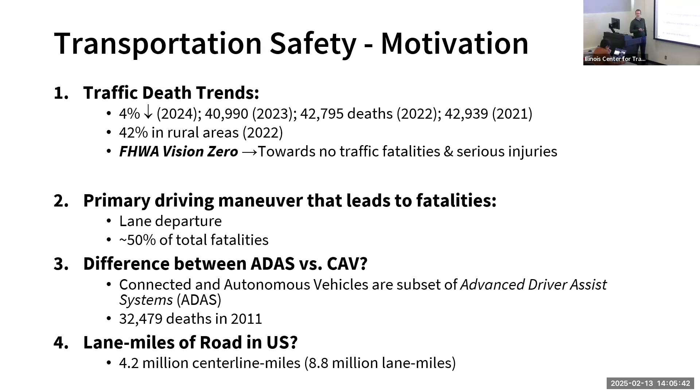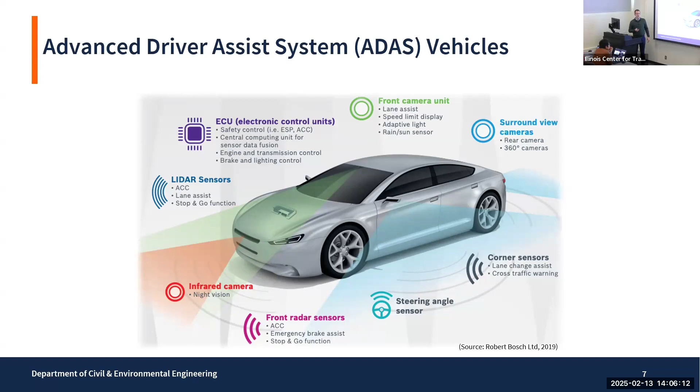We have all these sensors on vehicles that can do amazing things. They can automatically stop our vehicle from collisions, keep us between the lane lines in many cases, and do adaptive cruise control. So how do we use this better where we use the roadway as a sensor? That's the challenge, because most of you work on transportation in terms of the pavement and material side. Keep thinking about how you use the roadway as a sensor. What are the big problems?

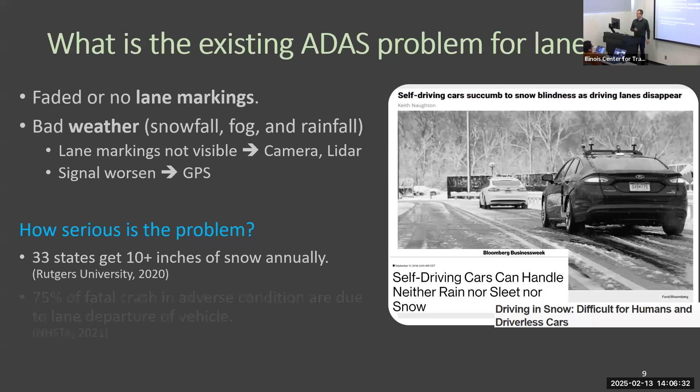Some of you have seen this: if you've driven in vehicles with lane assist in adverse weather, they don't work so well. They can't detect the lines, because that's how they work, based on computer vision. That's kind of how we got involved in this - the lane assist systems don't work that well. They work well in Phoenix where it doesn't rain and you get sunshine, or the Bay Area where you don't have rain most of the year. So how do we do this better with what we have here in the Midwest?

One of the former PhD students came up with this idea: if we change the electromagnetic signature of roadway materials and focus on an area where we can detect a high electromagnetic flux, we can detect it and keep the vehicle in the road, but without any contact and without any active sensors. These would just be passive sensors because it's just bending the Earth's magnetic field and we're detecting it. This was Sachendra Dahal's PhD thesis, and it could work very nicely and complement what current vehicle computer vision systems do.

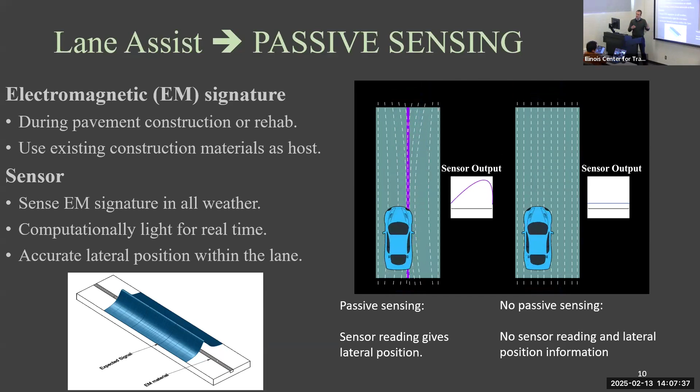You're just creating a material passive sensor that goes in the host binders we already use, whether it's cement or asphalt. How does that work? Well, imagine a sliver of the roadway has this electromagnetic material - you could just put some ferromagnetic material like steel, and you have these little magnetometers, about this size, they're not that big. These magnetometers can detect changes in the electromagnetic field of the Earth or the area, not just the Earth.

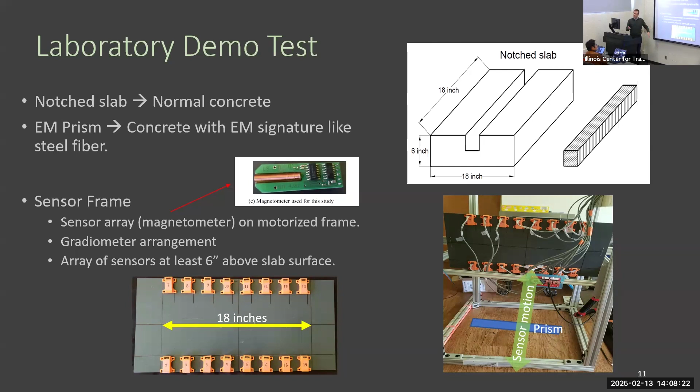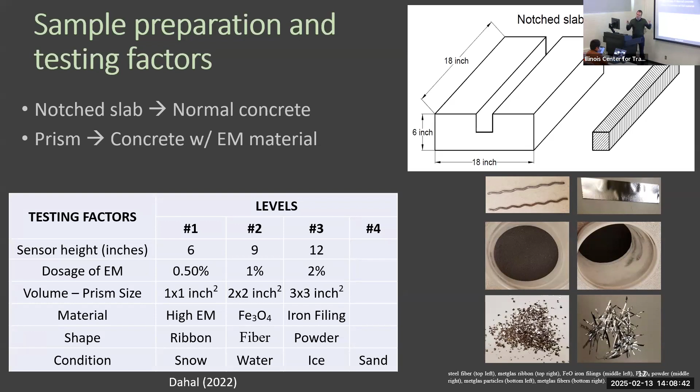You can put them on a sensor body, and then detect when you cross over this area with various sensors. So it's pretty simple, actually. The nice thing is you can use a lot of different types of materials - you can use steel, or other ferromagnetic materials with high magnetic permeability that are easier to detect. The point is it's not just one material, you can use a lot of different materials to do this, and we showed that successfully.

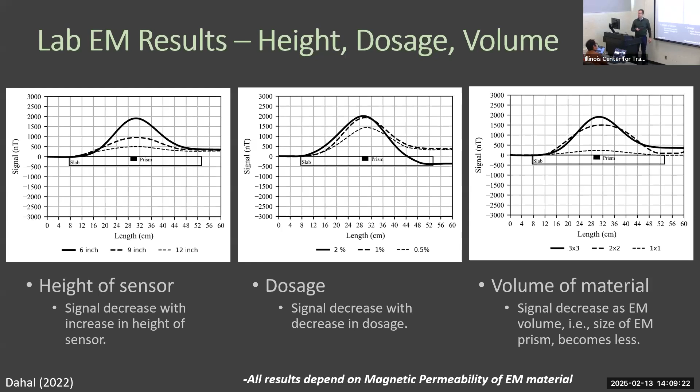This is an example of a signature you'd get from these electromagnetic materials. If you put them in a small sliver in the roadway, this is the center of the roadway, you can see a very large detection. These magnetometers detect nanotesla, and we feel like we can detect 300 nanotesla and consistently process the signal. Here you have almost 2,000 nanotesla, so this is very easy to detect. But these are very small changes, and we can do it pretty easily with very small percentages of materials in the roadway.

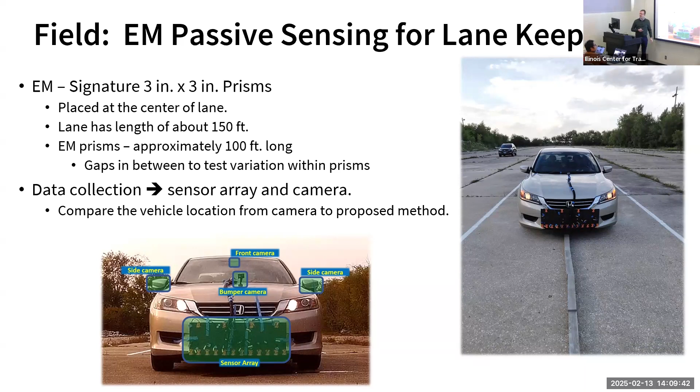We later put these sensors on a vehicle, which happens to be Sachindra's car - thankfully he had a car. We bolted those on and ran tests back here where we looked at different weather conditions and whether we could detect where we are on the roadway.

It worked very nicely. In fact, camera-based systems in good weather can detect where they're supposed to be within 1 or 2 inches. When it snows, which is the other shaded area here, they have much higher error because the snow causes the camera system not to work so well. But with the electromagnetic materials and the magnetometer, we can still be under 2-inch detection because we're just detecting magnetic fields. So this was Sachindra's work.

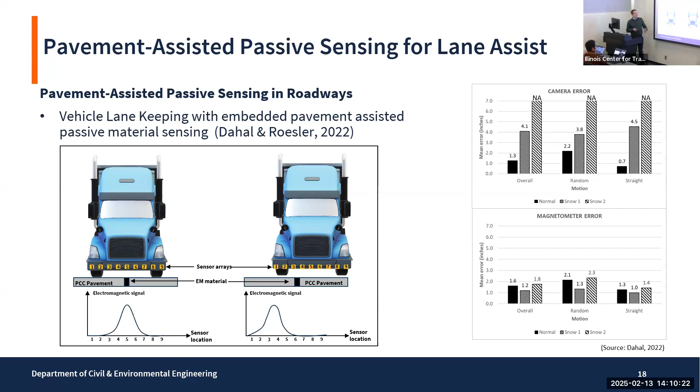So imagine now that we're trying to use the new vehicle technologies to control the vehicle in terms of its position on the road.

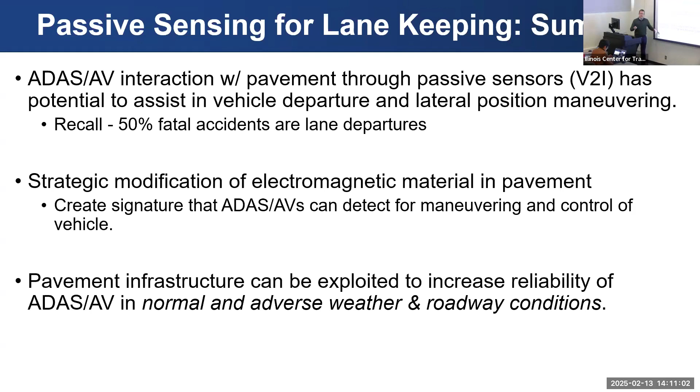And if we can warn the driver they're going off the road, not even drive the vehicle autonomously, then we should help with this Vision Zero goal. So we need to modify some of the roadway material efficiently, and if we can also do this in many different weather conditions, we're not confined to nice weather to drive autonomously in the future. We can do it anywhere. Okay, so that's kind of my background.

This helps you see what we're doing now. So we got into work zones, and you may ask, why did we pivot into construction work zones? So we finished Sachindra's work, we applied for a patent for that, we actually started a business because we had to get more funding. But we decided we had to pivot. So anybody have an idea why we had to pivot?

Maybe because construction work zones offer you more flexibility to implement the passive sensors you need to install. Okay, so that's part of the answer.

So we actually went and talked to a bunch of people who own roads, safety engineers, and we found that most people didn't have a great understanding of how the vehicle technologies even worked. So the problem we were looking at was not even something they were thinking about or worried about. We wouldn't want to say we're ahead of what's going on, but the people who own the roads don't even perceive this to be a problem, but they did perceive construction work zones to be a problem. They knew about people that had gotten in accidents or hurt or killed. So they said, well, if you could use this in construction work zones - now, it wasn't necessarily something I wanted to do, but that's what people said they would be more interested in.

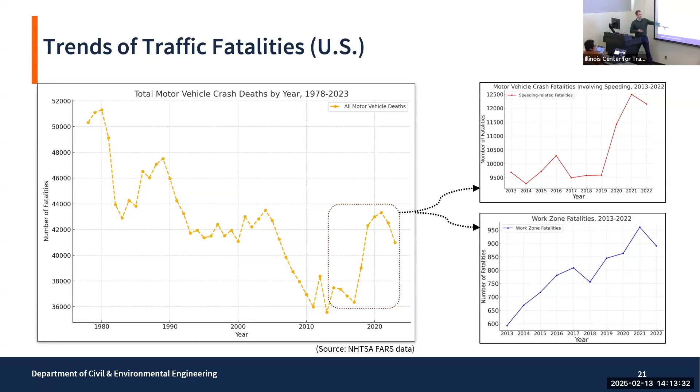Now, interestingly, I said we had around 40,000 deaths. Construction work zones, it kind of peaked out close to 1,000 fatalities. So not the biggest problem, right? 40,000 versus 1,000, they're all bad deaths, but this was the one most agencies thought would be what they'd be more excited about doing. So we wanted to tackle, okay, what's going on in construction work zones?

And a lot of research is going on in construction work zones. Luckily there's some funded projects here from ICT on construction work zones. I think Professor Ouyang was involved - I found out he was involved. We read his report with Professor Khaled El-Rayes and found some very interesting data in there that we could use.

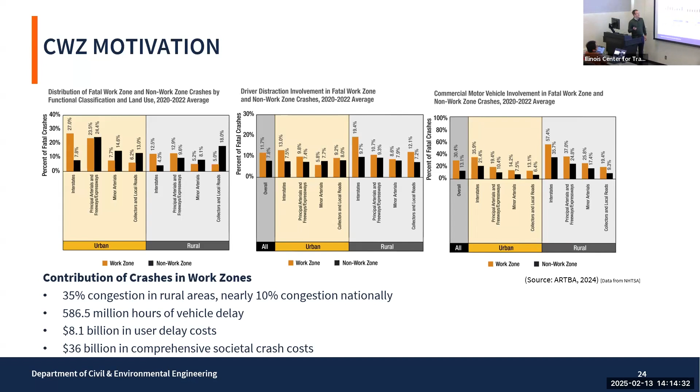But really in construction work zones, there's generally a higher propensity to happen in high functional classes like principal arterials or interstates. You have more accidents overall in construction work zones due to distractions. And finally, you have more likelihood of commercial vehicles being in accidents in construction work zones than on the general roadway. So there are different reasons for construction work zone safety hazards relative to normal roadways.

This was in a report by Khaled El-Rayes and some of the other faculty members. Unsafe speed conditions were a primary factor that fits into the previous slide. People then, because of the speed, were changing lanes. And of course, in a work zone you lose lanes. And then finally, where were the crashes? Well, they were typically before the work zones where people were speeding.

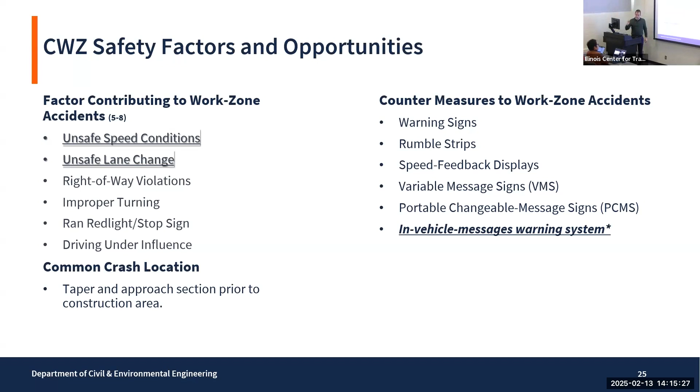And then people have tried a lot of countermeasures, but we found one that was interesting in this report on in-vehicle messaging that seemed to show some success. And if we warned people in their vehicle, not just a visual that they can see, but actually an audio-visual message in the vehicle, it may be safer.

This is a study done in 2018 that was published, and it showed that if, for instance, this green line here was - there was no message to a vehicle entering, by the way this is simulation, not real. If no message before a construction work zone started, this is at 0, this would be the average speed of the simulated driver. If you did give some mixed messages, that's audio and visual, you can see the speeds decrease quickly, and they decrease all the way to where the construction work zone started.

The other interesting part was that people tended to merge quicker when they had a mixed message in the vehicle. So we started thinking, well, if we can give the vehicle a message early inside to the driver - and we knew that your new vehicles have an easy way to give audio-visual messaging, right? You have a screen, you have speakers, then that's very possible.

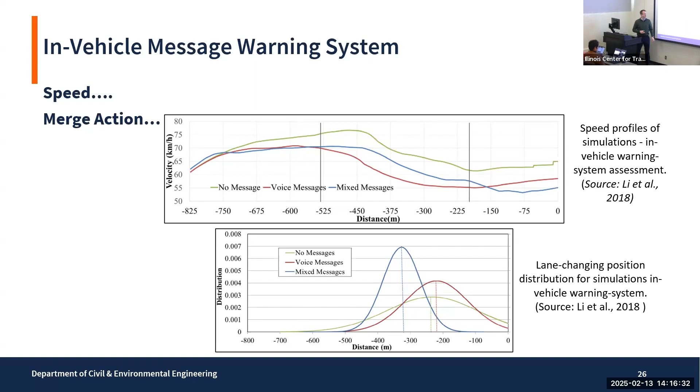So this is where we came up with something pretty simple, and this is what we applied the patent for: if you could just imagine making patterns in the roadway. We called it invisible markings. You can make patterns like four lines, and we can detect speed. If we have diagonal lines, we can tell the vehicle to move over. So we have patterns we put in the roadway, kind of like a QR code, not exactly though—a UPC symbol probably is more accurate. The vehicle reads these patterns and says, this is what I'm triggering to tell the driver. We could also have another pattern that says you're leaving the work zone so you can speed up, things like that.

So the short summary is if we put these patterns on the roads, we can detect them with the vehicle in theory, and the vehicle has to process the signal quick enough and tell the driver what to do.

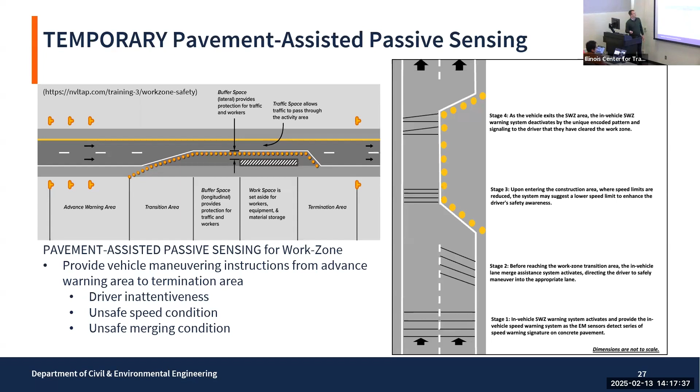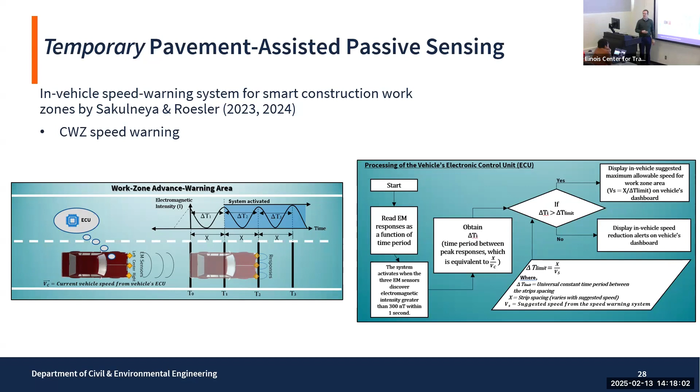So that's the idea. The first one we came up with is pretty simple. The algorithm is you just have equally spaced transverse lane markings, or invisible markings—really not lane markings, this would be your electromagnetic material. If you detect them and the time to cross them for the vehicle is less than the speed limit time, then you just tell the vehicle they need to slow down. Or for the merge, this is our merge left trigger, and if you sum up the times at different sensors, the vehicle recognizes they need to merge left because it sees there's a diagonal pattern on the roadway.

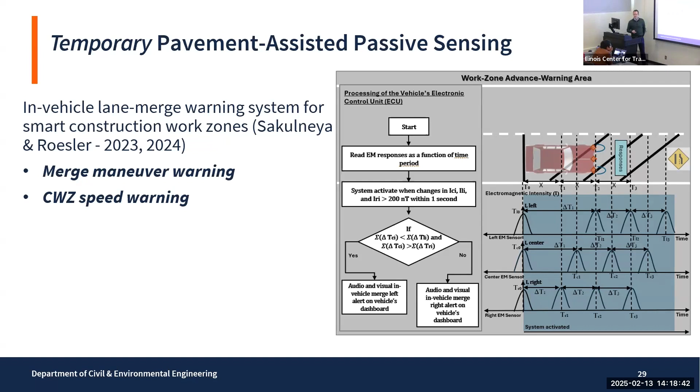So this is the idea. We thought it seemed like no one was actually looking at this. People have been looking at messaging boards and rumble strips, and there's nothing necessarily wrong with those, but we wanted something where the data suggests this is much better, particularly with distracted drivers.

So the first step was to build something in the lab. We quickly bought some magnetic tape that we could put on top of some strips. We had a kind of robotic frame here that could move like your car could move, just at very low speeds, just to make sure we understood how this would work and how we would process the signal. We had our magnetometer sensors set up as such.

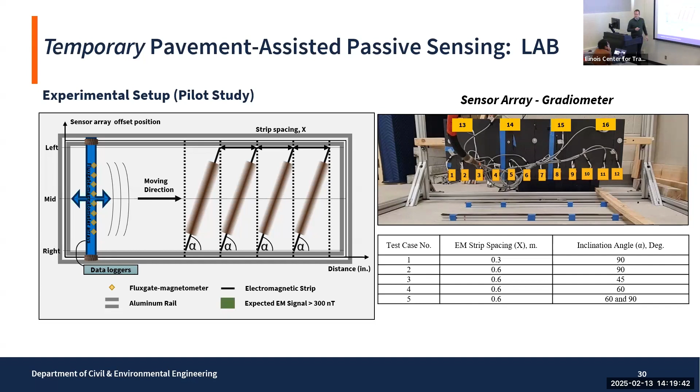By the way, we had to set up two magnetometer sensors because this detects the Earth's magnetic field, and so does this one, but this also detects the magnetic particles on the tape. When you subtract the two, you just focus on the magnetic particles. So these magnetometers actually pick up the Earth's magnetic field—if you don't subtract them out, you have no way of resolving the signal. I'll show a picture of that later.

This was done though, where we have our sensors here. We just had some strips, and we wanted to look at different spacings and different orientations. We did a lot of different pilot studies just to understand the system, the acquisition rates, what the signals look like. Initially we realized that when we did one-foot spacings, which we didn't think we'd do in the field, but in the lab we ended up getting crosstalk between the different magnetic lines because they're too close—the magnetic fields kind of overlap, and the sensor had a hard time picking them up.

So when we moved the strips further apart, you can see that the sensors clearly detected each of the lines. Here I'm showing four different sensors on the sensor bar. We're just looking at the peaks, which means the sensor is basically over the line. If you get the times that the sensor crosses, you can then calculate the speed. Obviously this was a slow moving robotic frame, so 0.14 meters per second—that's really slow. We wouldn't expect that outside, obviously.

This is what our sensors look like when we did them on a 60 degree incline. You can see the offset now between sensors over here versus sensors that cross over here, so you see all these delay times. When we speed up, the delay times are obviously going to be less, but you can still pick them up as long as your data acquisition rates are higher. That's an example where you could create a pattern where you recognize, let's say, an exit ramp or something. That was just another idea we had.

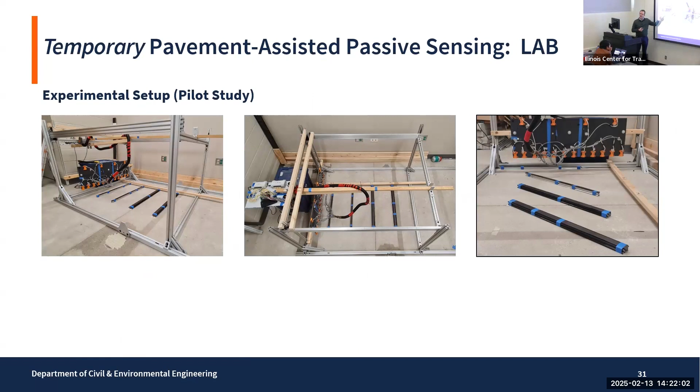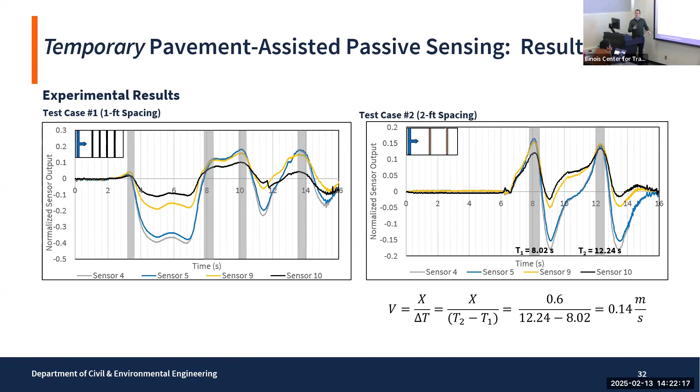One note is these sensors were called one-axis magnetometers, and they just measured the electromagnetic flux in the vertical direction, like in this direction. But actually, magnetic fields have three directions. So we wanted to test a new sensor, a 3-axis magnetometer, to give us more redundant information, because sometimes the sensors have noise on them and you can't resolve the signals. So it's good to have multiple axes reading the same type of signal, or at least similar signals. That was one of our new things.

We also wanted to expand on a question people always ask us: what if I don't want that electromagnetic signal in the roadway? How do I get it out? Before, we talked about embedding electromagnetic particles in the road. Well, how about if you want to turn that off? Can you do that, or do you have to rip out the road, particularly in construction zones, because construction zones will be temporary? So if we imagine embedding the ferromagnetic material in the roadway, we can't take it out very easily without taking up the asphalt or the concrete.

So I want to show something about that. We did a few field tests that you'll see in a second. Field test means outdoors for us, not necessarily with the vehicle. We're doing a vehicle test now with Professor Talipur.

Let's talk about the programmable signatures. We started this back in Sachindra's thesis, but essentially, would it be possible to have a signature that we could program to be turned on and turned off? Wouldn't that be nice? So if I wanted to have my lane keeping feature on during construction and then wanted to turn it off, could I do that? It turns out there are materials you can do this with, where you can magnetize them at fairly low temperatures, and that's what this Curie temperature means.

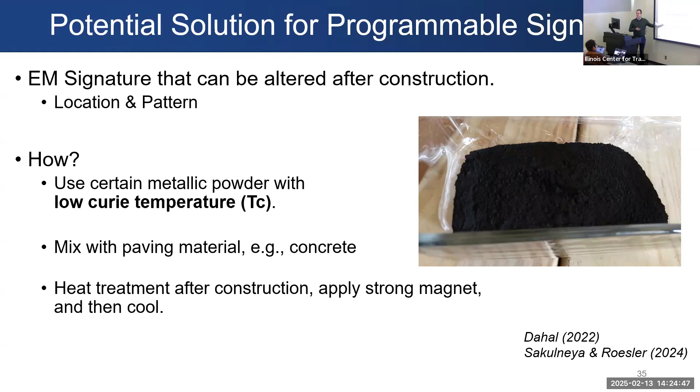This is just a little figure to show that if you have chromium dioxide that is demagnetized, and we heat it above 120 degrees Celsius, we can align its dipole moment such that I can make it very magnetized. As soon as I want to demagnetize it, I just turn it to 120 degrees without the magnet and it goes away. That was a nice little feature the student figured out.

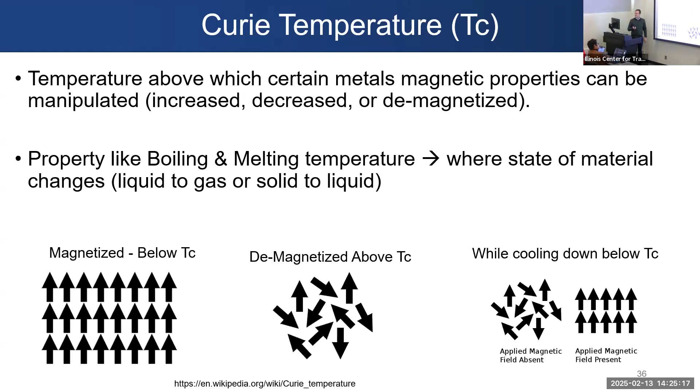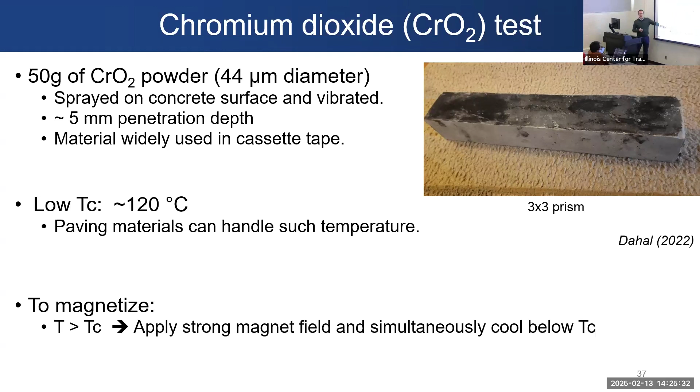So we did some lab tests where we put some chromium dioxide in the top of fresh concrete. We embedded it in the top 5 millimeters of a concrete prism. We then heated the whole thing up in the oven to 120 degrees Celsius. Then we applied a magnet—these are some permanent magnets in a frame—so that we could permanently magnetize that specimen I just showed you. So you have these permanent magnets that magnetize the chromium dioxide.

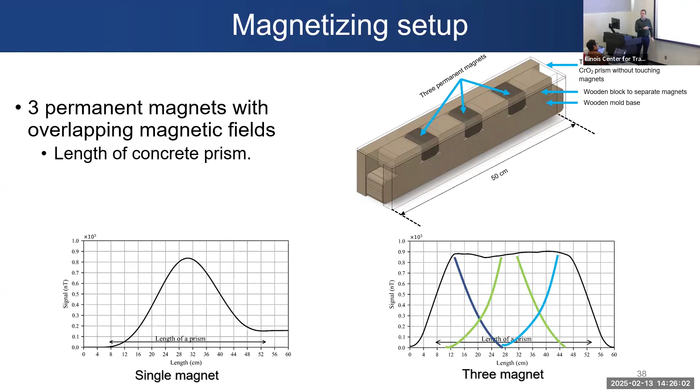So you can imagine if I put this in the roadway, I could have a truck that drives over it with these permanent magnets and a heater to create a magnetic field in this material. This was our little test here where you have the chromium dioxide being magnetized. Because the magnetic field will mimic what the permanent magnet has for features, you have to be careful how you orient the material. We're trying to maximize the vertical orientation of the magnet.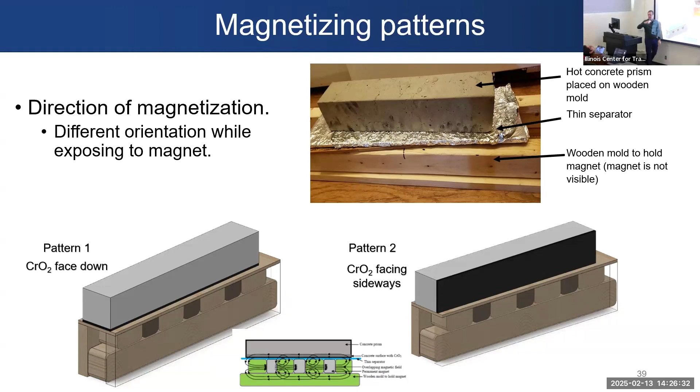Then we did another test where we turned it 90 degrees to see how the magnetic field changed, to have a different signature. So those were two cases. This just gives an idea of what would be the unmagnetized material.

It's not always zero, but it's pretty close to zero. This is the signal. And then if we magnetize it, you can see it's about 8,000 nanotesla, pretty high. We only need to measure 300, so this is probably too much material, but this was just our first try.

Then if we heat it again, we just demagnetize it. Same specimen, we just heat it above 120 in the oven, take it out, and it demagnetizes.

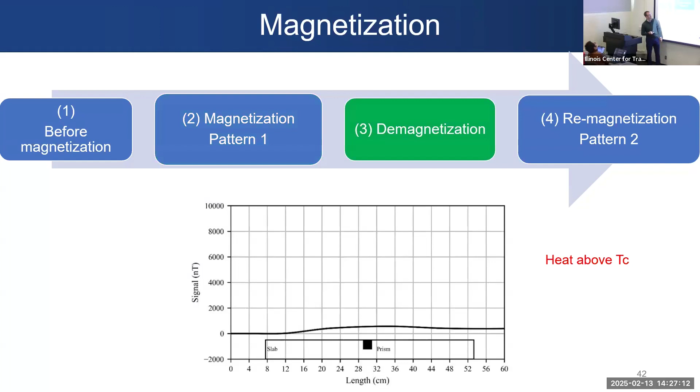And then we tried the second pattern, which was on its side. When you magnetize that same material with a different orientation of the magnet, you get a different signature pulse. So you can actually embed signatures that you could detect, and tell some more information about what you want to do in that magnetic field.

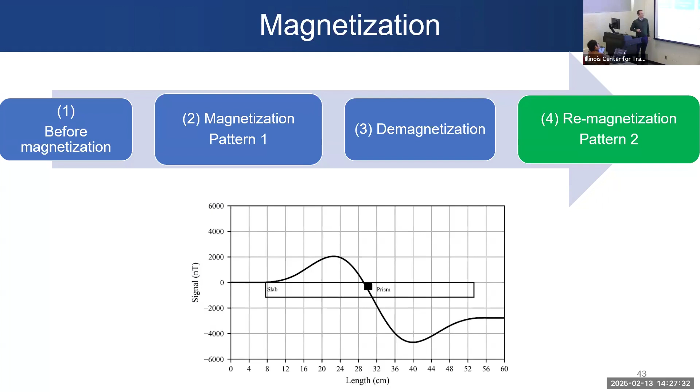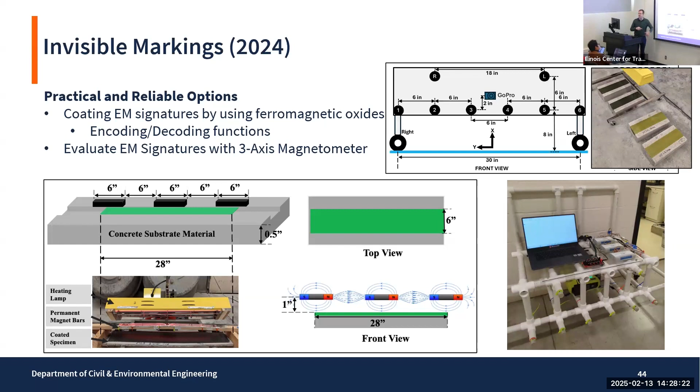And he built this cart here that you see. This cart is the schematic of this cart here. The magnetometers are these things at the end of the PVC, and these are 3-axis magnetometers. Essentially we built some concrete with some epoxy that we embedded the chromium dioxide on. We had a heating lamp here, and then we also had some permanent magnets, hard to see but they're over here, that can magnetize this material. Then we're going to put these markings outside so we can actually do some measurements.

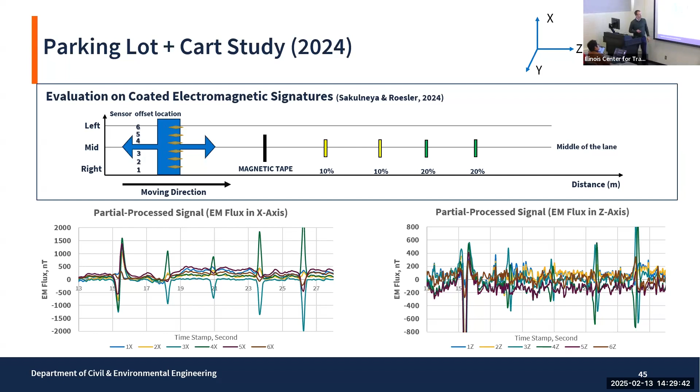But there's a lot of noise. There's also a Y direction that I didn't show here. But at least we decided that 20% was probably a pretty good number based on knowing what signal we could look at with our signal processing. Somewhere between 200 and 300 nanotesla was what we could detect. So we decided to make most of our specimens with 20% of the chromium dioxide for this particular study.

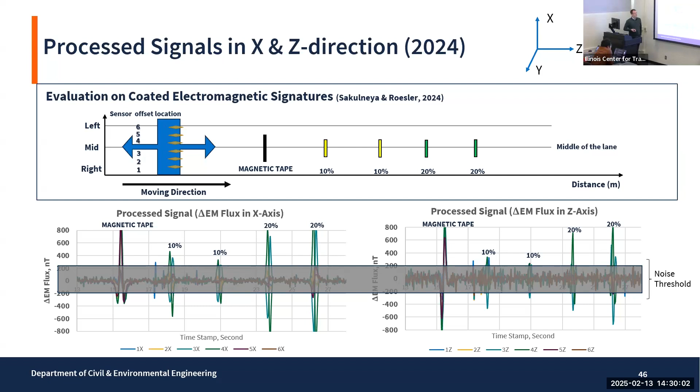It doesn't have to be this type of material. There are other materials that can do this. And so we then built some more samples.

And this was parking lot number 2 by Uni High. We didn't even have to rent it because no cars were there in the summer. At least that's, I mean, we had some good runs here. So we wanted to look at the magnetometers again, look at our invisible markings. And then really this time we wanted to focus on a little higher speeds, which means he had to run really fast in the parking lot.

And we wanted to make sure our signal processing would work correctly. So these are the invisible markings, even though they're on a kind of fiber cement board. If you can imagine this outside, we would probably just spray a clear epoxy material, and it would just look invisible. You wouldn't have to see it. You wouldn't want it to be seen actually, because it would confuse drivers.

So we have our magnetometers again here. We have 2 rows of magnetometers because you need both rows to cancel out the Earth's magnetic field, and a power supply, of course, and then a data collection system.

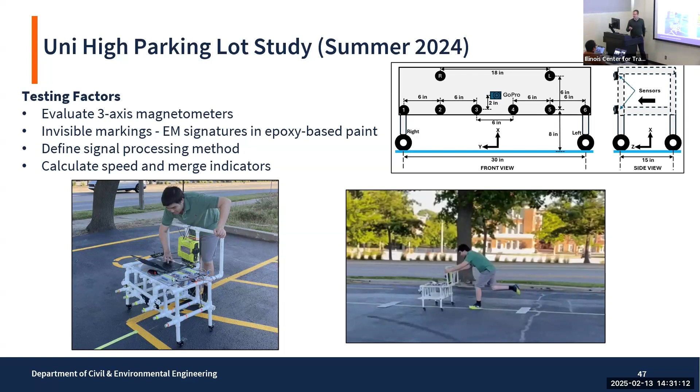I don't know, is that as fast as you could go?

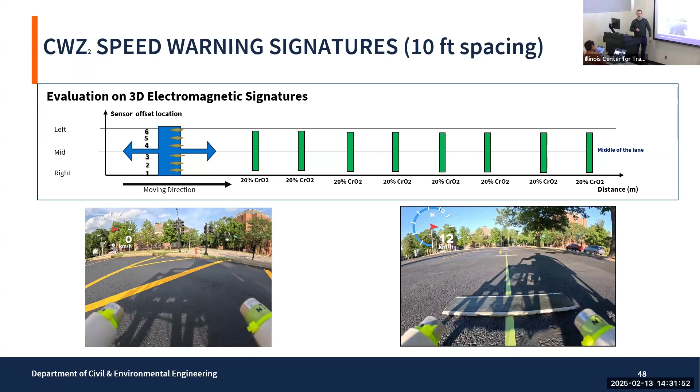So these again, this is another picture of the invisible markings. These are the 3-axis magnetometers, so very small. So what's the data look like? This is the data that comes out of the magnetometers.

Sensors 2, 3, 4, and 5 are sensing the vertical direction here. But note the units here, this is actually in nanotesla, so this is almost 50,000 nanotesla. The reason why this looks kind of strange is because we only showed you the bottom sensor rows, and this picks up the Earth's magnetic field as well. So you have to subtract the top sensor from the bottom sensor, and that subtracts out the Earth's magnetic field, which is around basically 48,000 nanotesla.

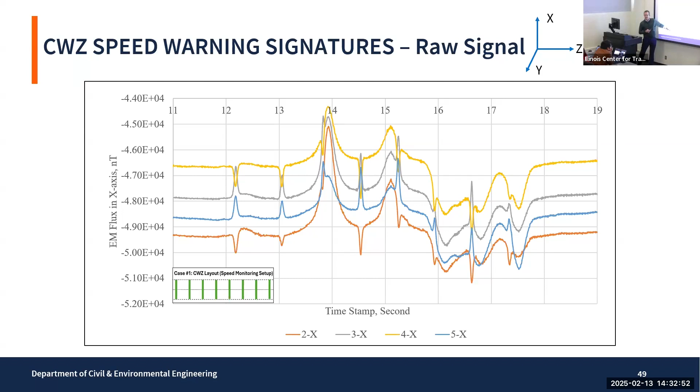So the Earth's magnetic field is way higher than the magnetic field we're altering with these materials, and it works out very nicely when you subtract them. You can also zero each of these measurements because we make this relative to the start position. So once I subtract out Earth's magnetic field, I zero the signals. Now it looks like something reasonable that I can detect. You can see there's still noise in the signal, but these are all the same material in the X direction.

If a path isn't going to go exactly straight, that's why you see a difference in the peaks. Could be something to do with the materials not being mixed uniformly either. But we had to do a little bit more signal processing.

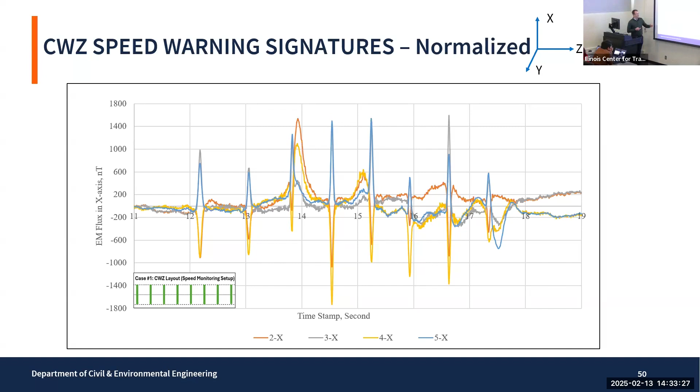So we did some more processing where we basically took the change in the electromagnetic flux after each data point. We just took the difference between consecutive points, so it's kind of like a derivative, not exactly, and we get this. So this even looks better.

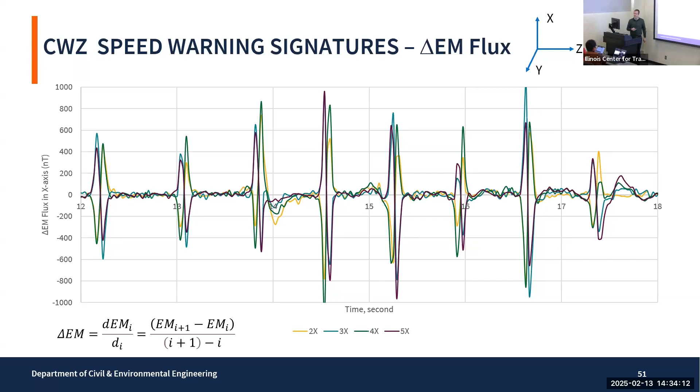So this is the change in magnetic flux here on the x-axis versus time. We can then process the first peak here very easily and calculate the time. The time between the peaks would tell us my speed. We could do that approaching the construction work zone or in the construction work zone, and then tell the vehicle, this is how fast you're going, or slow down.

We also did it for the Z direction, which is the forward-looking direction, and we got most of the peaks with the Z direction.

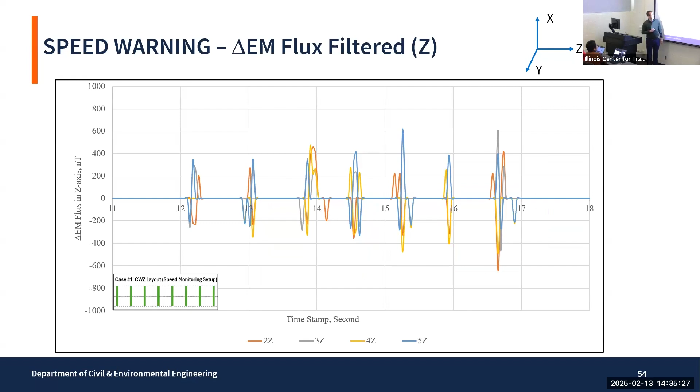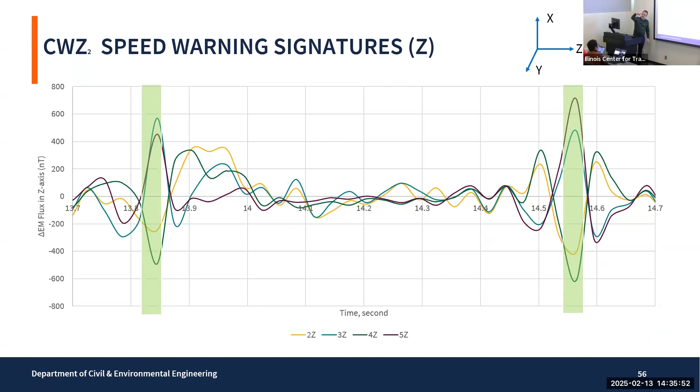So we would just calculate speed based on the peaks, like these 4 sensors versus those 4 sensors, and the next invisible marking, and that time difference and the spacing we knew it to be 10 feet, then we can get the speed. We could also do it for the Z direction. That was for the X direction. X direction was up and down, I know that doesn't make sense. Z is forward. We can do the same thing.

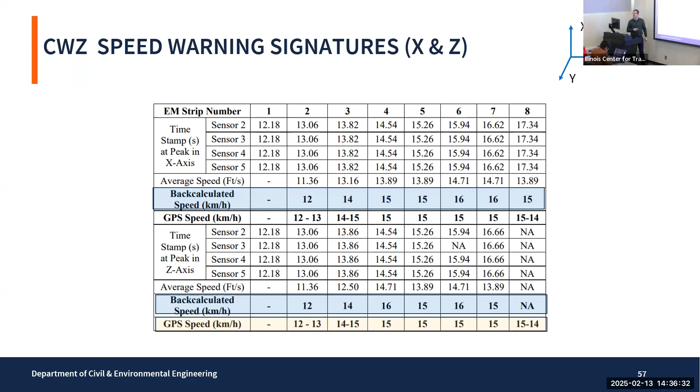This is a recent paper we published. These are the back-calculated speeds from those signals. For all 8 of the strips, you can see anywhere from 12 to 15 kilometers per hour. This is what the GPS speed was that you saw on the camera, so it's pretty consistent with what that was measuring. We could do that with the X sensors or the Z sensor on that magnetometer. The multi-axis magnetometers were nice because we could verify speeds with different directions of the magnetic field.

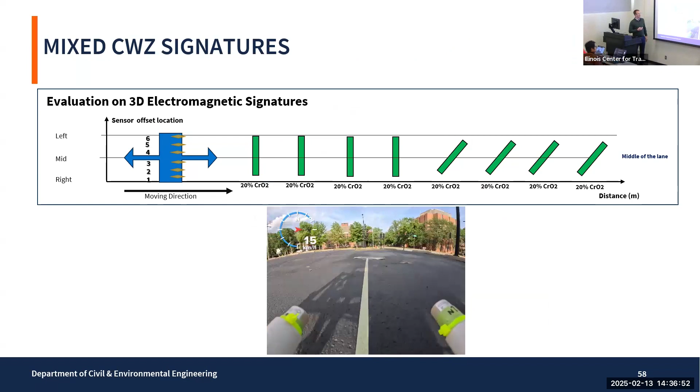Finally, I won't spend too much time on this. We looked again at particularly the inclined lines that would tell cars to merge, since that's a major issue. We could also find speed with those inclined lines. You can see the inclined lines. So even though these are inclined, I can still find the speed, as well as looking at different sensors transversely, I can tell the time differences, and then I know that it's an inclined sensor or marking.

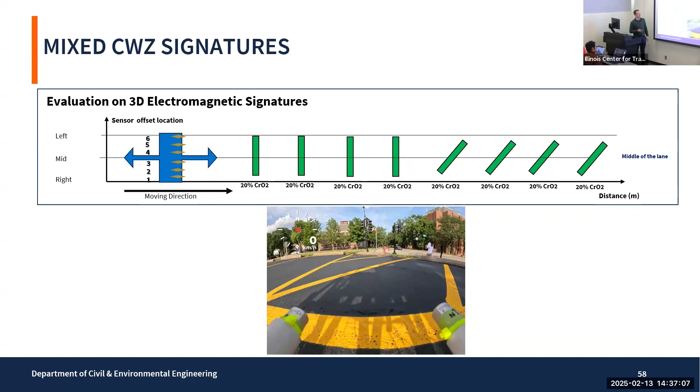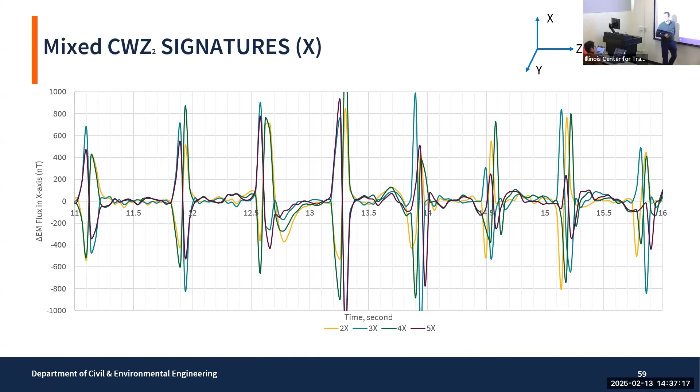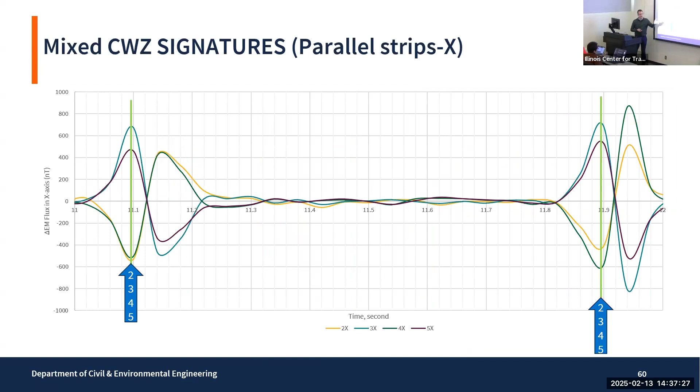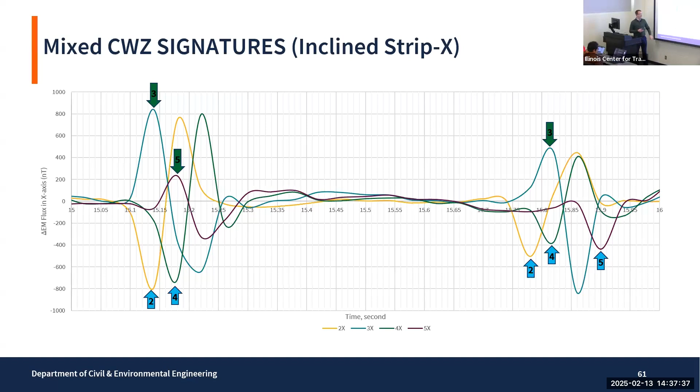We do the same thing. These would be the speed sensors only, and then these are the inclined sensors. You can see slight time differences between the sensors because they're offset transversely. This would be speed, these are all the same. When they're all the same, that means the sensor's transverse, or the marking's transverse. These are showing, again, different time offsets, so I can calculate speed, and I can tell if it's merged left or merged right.

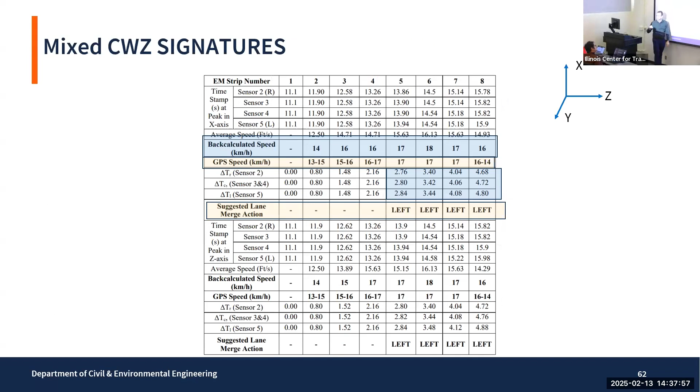And these are the key points for the merge here, that the time differences tell us that I have a merge. So it's not that different: 2.76 seconds versus 2.84. That's down in the 100ths of a second, but you can accurately pick that up with your data acquisition system.

Okay, so hopefully I went through a lot of slides there, a lot of experiments, but I think I've argued that construction work zones need some improvements. So do lane departures, for that matter. And I think advanced vehicle systems can get us there, can be part of the solution, not the only part of the solution. So this idea of using the road somehow as a sensor, I think there's a lot more work to be done in this area.

Magnetometers, we need those on the vehicles if any of this is going to work, and they're very inexpensive sensors. I think if you buy them in bulk, we can get the cost down. These are not like LiDAR. LiDARs cost you $5,000, $10,000. These sensors should be around $100 in bulk, probably even less.

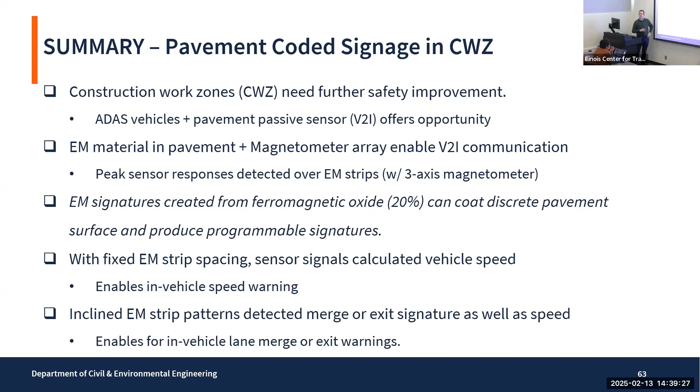We can use programmable materials where we can turn them on and off, and I showed you chromium dioxide was one example. By putting these patterns on the roadway, they're kind of invisible, we could tell the vehicle different signals pretty easily, and much cheaper probably and much more permanent in a construction zone than rumble strips or all these expensive signs. I mean, I think the signs are fine in general, but they're not the only way we can communicate to people in vehicles. That's it.

Is the pattern of the magnets on the cart similar to what you would find in a commercial vehicle right now? What do you mean? The patterns, so you have several magnetometers in the cart, right? Correct, those don't exist in a vehicle. Yeah, you have these attached to this. Correct, correct.

Sir, these programmable materials, what about their reusability, like heating and reheating? Do they lose their performance? Well, one can expect some permanent magnets degrade with time, so I think for temporary applications I don't think it's going to be an issue. But yeah, one can expect some magnetic loss, so you need to have a signal that's high enough that even if it had some loss, you wouldn't be below the threshold.

Thank you for the presentation, very interesting idea. I'm wondering why you don't use a magnetic tape that you can remove. You could do that, there are some magnetic tapes, we use some of it. It would be more cheap than this material you put inside. Maybe, the only downside, and if someone wanted me to do it tomorrow, that's what I would use. However, we could imagine spraying an invisible epoxy that has this in it, that's a little more permanent than a tape that can easily be peeled up, particularly in the winter here. This is the issue with markings, they get covered up or the snow plow hits them and they get scraped up. So I'm not saying tape doesn't work, it just has some temporary problems.